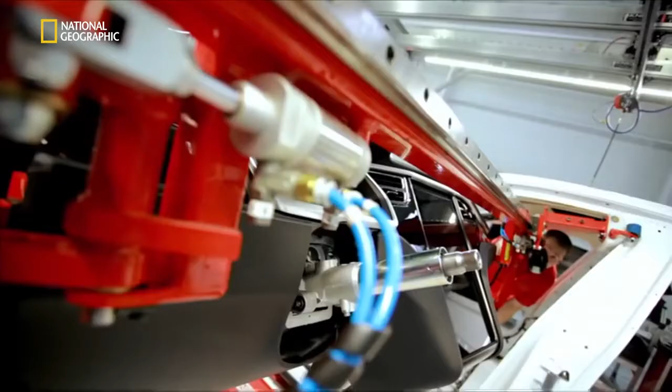At first glance, this car is the latest in a long line of high-end sedans. But that is where the similarities end. The Model S is a totally different type of car. Tesla believe it can lead a revolution and change the face of motoring forever. It's the first ever mass-made premium sedan powered purely by electricity.

Designed to have speed and range, and not a drop of gas. Our goal is to create an electric car that is the best car in the world and show that that's what an electric car can be. Tesla's goal is to kill off the combustion engine and prove the electric car has finally come of age. Driving a gasoline car is going to feel like yesterday. Driving this car is driving the future.

This is Elon Musk, Tesla's co-founder and CEO. Elon is an inventor and a maverick entrepreneur, one of America's youngest billionaires. I like exploring, I like technology, I like creating things that have never been seen before or even imagined before.

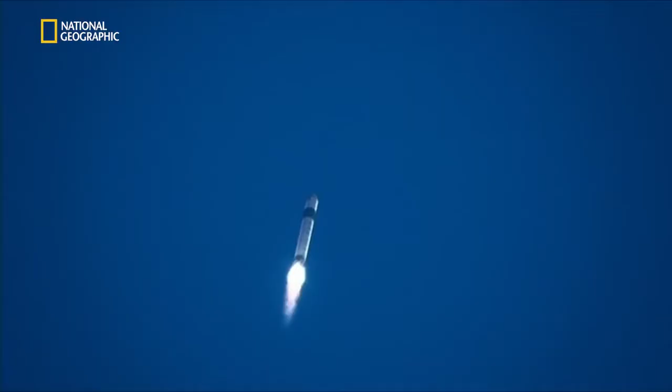He is a genuine Silicon Valley success story. In the mid-1990s, Elon set up a small internet company. By 2002, he'd sold PayPal for $1.5 billion. Next, he founded private rocket company SpaceX.

It's all part of Elon's life mission. When I was in college, I tried to think about, well, what are the areas that would most affect the future of humanity? So the three things were the internet, making life multiplanetary, and the third being sustainable energy. So that's what really ties together my companies, is that sort of thought from 20 years ago.

Tesla Motors is Elon's sustainable energy brainchild. Named after electric power pioneer Nikola Tesla, it's a car company that only makes totally electric vehicles. No hybrid and no alternative fuels. Absolutely no tailpipe. The company estimates their electric cars cause 50% less CO2, even if much of the electricity comes from a coal-powered plant.

It's technology Elon and co-founder J.B. Straubel believe we need. We're solving problems for our children, our grandchildren. Oil is a finite resource, and eventually we have to find alternatives. When you take that oil out of the ground and you burn it, it's extremely dangerous. We should not play Russian roulette with the atmosphere. We only got one.

Tesla's founders have a vision of a world without gasoline cars. They are convinced electric is not only cleaner, but better. Now, they want to prove it to the world. They believe their cars can trigger a transport revolution and bring electric motoring to the masses. What we're doing here at Tesla can have an amazing impact and revolutionize the auto industry and make every car on the road electric. That's our end goal.

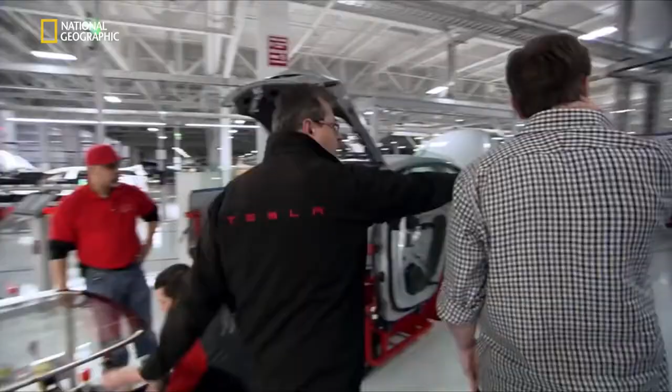Elon brings in Gilbert Passin as head of manufacturing. Gilbert is an expert from one of Toyota's award-winning plants in Canada. His description of my job to me was very simple: you've got to create the best factory in the world with the best people in the world and make the best premium car sedan. And I said, okay, so where's the factory? Well, you have to find one. Where's the team? Well, you have to make one.

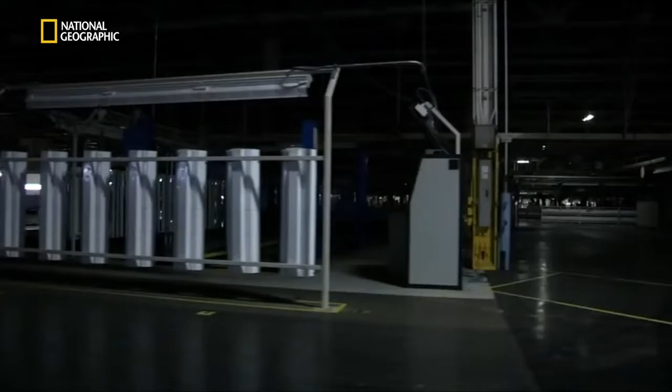The company purchased a former GM and Toyota site in Fremont, California, on the edge of Silicon Valley. The abandoned facility is a traditional car factory: dark, little natural light, bare concrete floors. When Tesla Motors move in, it's the birth of a mega factory like no other. It's a totally fresh approach to car manufacture.

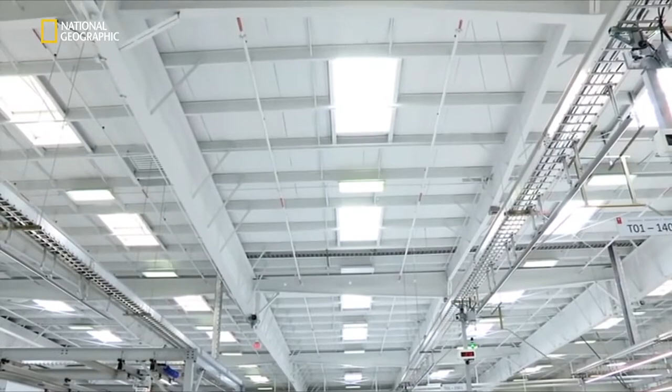The walls and floors are painted white. The machinery are striking red. Skylights and windows flood the factory with sunlight. If you make the factory pristine and clean, that sets the tone for the vehicle. We want that same sense of quality and precision in the car itself.

As part of the whole company ethos, bikes are provided so the workers can get around the factory. I think it's important to have an environment where people look forward to coming to work, so it's worth putting some effort into making the factory beautiful.

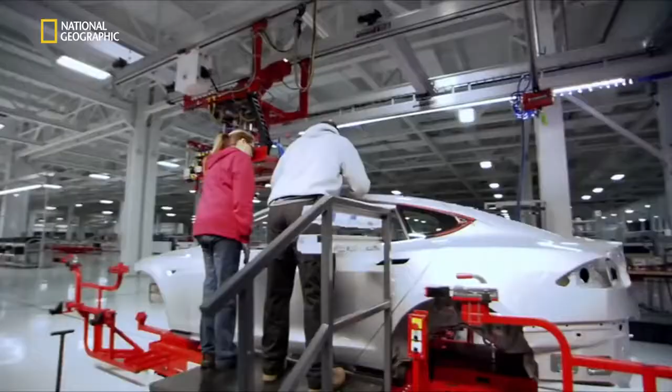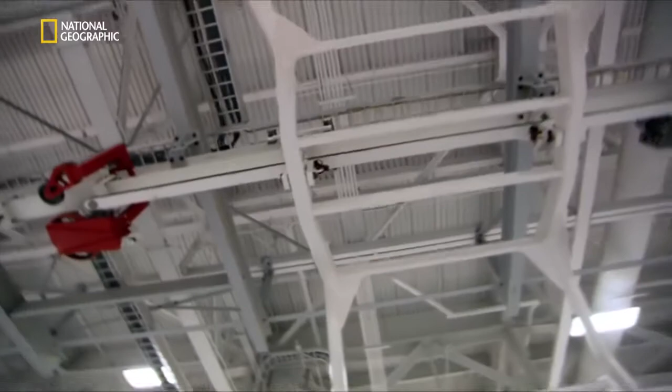In true Silicon Valley style, they fill the space with the most advanced technology, creating an automated production line capable of building tens of thousands of cars. Super efficient multitasking robots, self-guided smart carts, and computerized production schedulers. The factory is designed to be up there with the very best in the world. We love engineering. We love beautiful machines. We love new technology. We love to innovate with high technology. And also in manufacturing, we love to do that.

Without training, these sophisticated robots are useless. They all need to be taught before they can run tasks automatically. Every robot is programmed by hand. The Tesla team has meticulously trained 130 sophisticated robots over a year and a half.

One of the last robots still to be programmed is a multi-point welding robot. It will be used to join the car's underbody. These are pretty busy robots, so we got to make sure that our takt time is good.

A robot's work is only as good as the man who trains it. Brad Johnson is a welder with over 25 years' experience at the highest level. Getting this done today, we'll have the teachings all nice and smooth, and then we can start running 100% and full automatic. That sounds good.

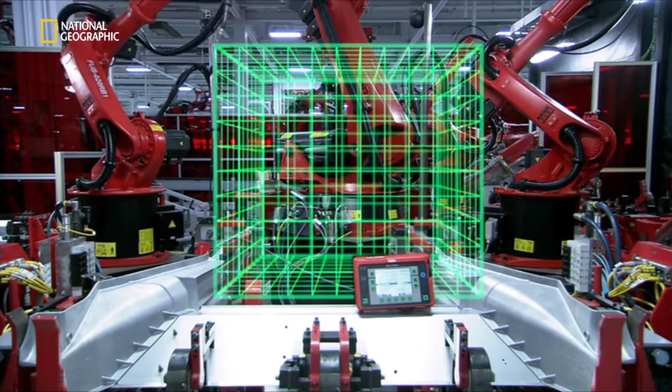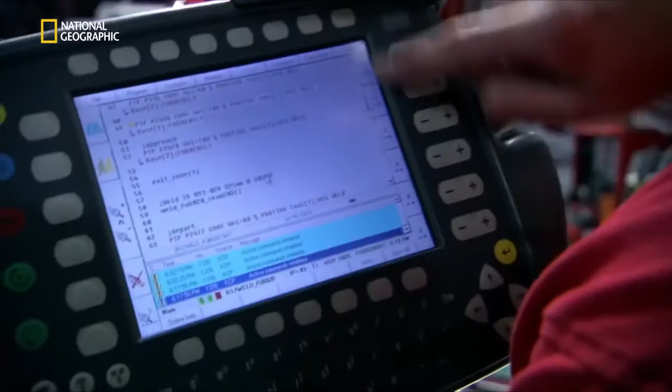The space in which the robot operates is treated as a three-dimensional grid. The head can be manually guided to any point using a teach pendant. There's our start point and our weld position. Brad guides the robot millimeter by millimeter and uploads the coordinates. The robot works out the most efficient route and runs the program.

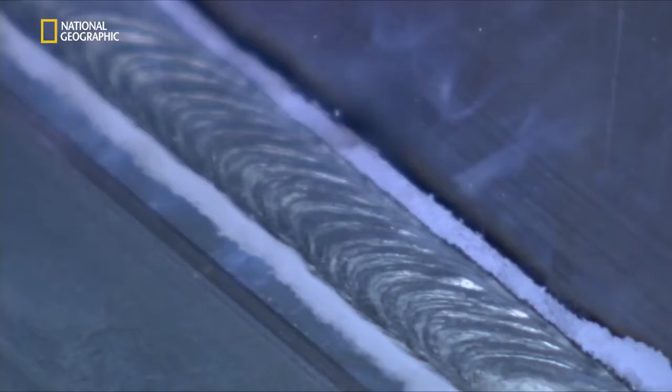Looks like the teaching is right on mark, and we have a really good quality weld right here. So we should be able to run full auto with this weld. When full production begins, Brad's handiwork will be exactly replicated by the robot 100 times a day.

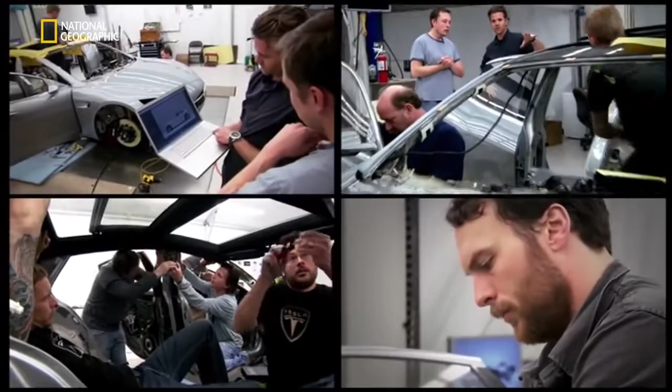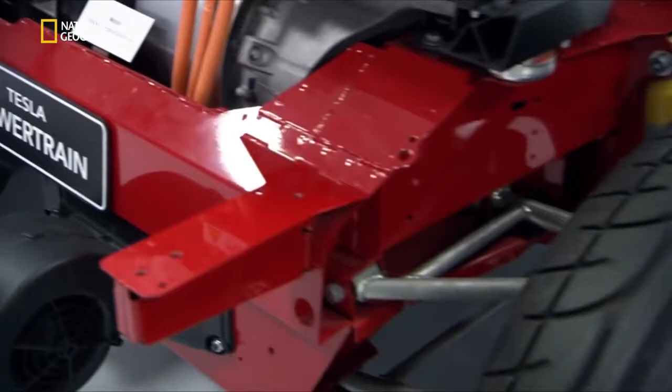Since their inception in 2003, Tesla Motors have been pursuing their electric car revolution with a step-by-step strategy. In an unconventional business move, Elon decreed that Tesla must invest in their reputation first and worry about profit later. Stage 1: make a small number of high-value cars that prove electric power can be desirable. The Tesla master plan is very simple. We start off creating an expensive, low-volume car to help break the mold in electric vehicles.

Plan in place, they set to work on their first car, basing it around the British-built Lotus Elise. 5 years later, they released the Tesla Roadster. Quicker off the blocks than an Aston Martin Vantage, the electric sports car astonishes the motoring world. Step 1 complete in the Tesla strategy. What we showed was that an electric car could be sexy, it could be fast, and it could be long range, and that if you produce such a car, people would buy it.

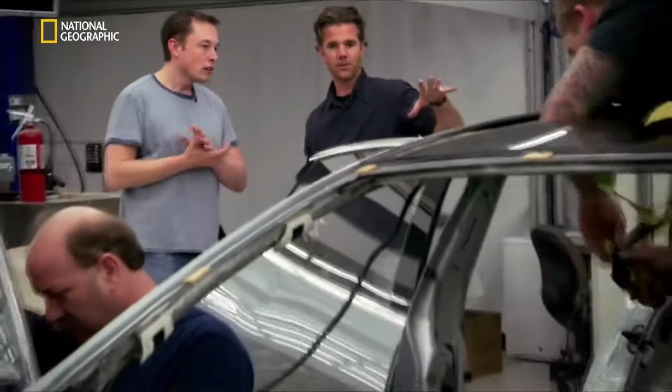But as a $100,000 two-seat sports car, it's a luxury second vehicle to most of its owners. Time for the pivotal Stage 2 in the master plan: a car that costs half as much and sells in much bigger numbers. A very important step in the Tesla strategy is really going to show that a mainstream electric car can be better than a gasoline car.

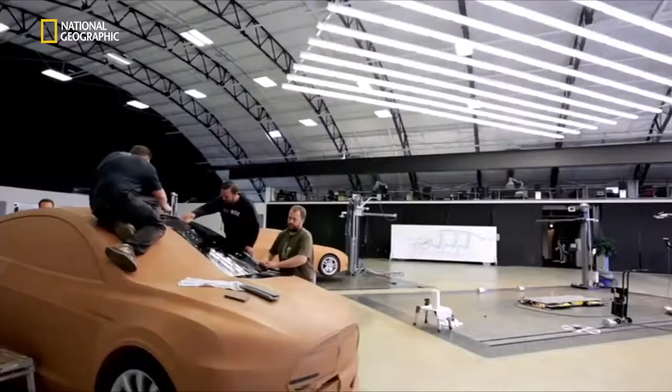The Model S is the second step in Elon Musk's vision of an electric revolution, a premium mass-market sedan designed and built from the ground up by Tesla. At the studio in Los Angeles, they are working to craft that car. The Model S is really the foundation of Tesla. It's the first true product designed, engineered, built, manufactured by Tesla, and it's really the beginning of what our mission is about.

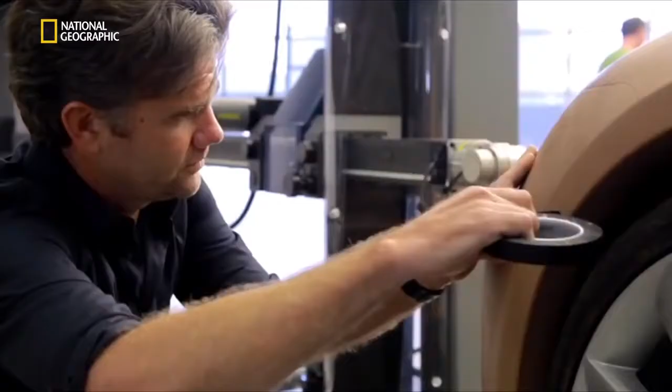Franz von Holzhausen is the chief designer. He believes Tesla's design needs to have some conventional appeal. It's really easy to have a clean slate and go pretty crazy with that. We had to start with something that people could relate to. If they even knew or cared that it was an electric vehicle, they were attracted to it.

We've stretched the sedan and made it a little bit more modern, but it's still a sedan. It still has this somewhat traditional cue, and so it's easy to love because of that association.

Although uniform in appearance, the Model S is a unique car. It was conceived as electric, and even the shape is designed to maximize the battery's range. The body and waist are all slim, so there's no excess fat or body mass on this car, and that translates into great efficiency.

This car is one of the most aerodynamic sedans on the market. In an electric car, conserving battery power is so important, the designers put huge efforts into reducing the drag. Even the door handles are aerodynamic, receding flush into the body.

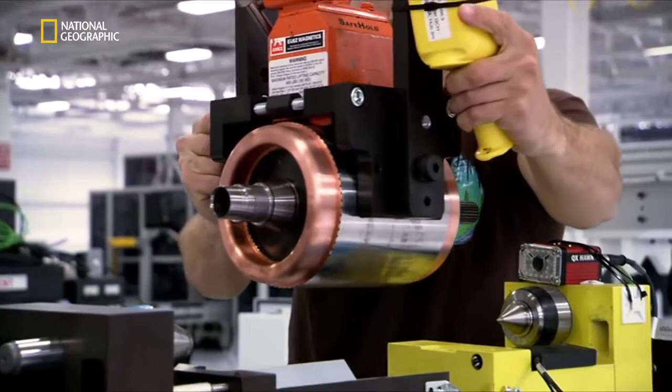But it's the interior that is most heavily influenced by the electric powertrain. The powertrain is incredibly small. You get the same performance out of a motor that's the size of a watermelon, fitting between the rear wheels, and everything else above that is what I call the opportunity space.

The design team started with the motor and flat battery pack and worked upwards. With the motor next to the wheels, there's no need for a drive shaft, so there is no rise under the rear middle seat. There is no fuel tank or transmission. The Model S has free space from the floor upwards.

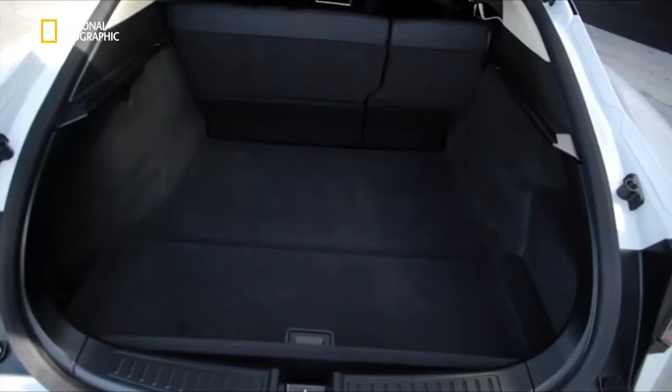What you'll see is a vast amount of space. In fact, it's actually so big that we decided we could fit 7 people, and we do that by putting 2 rear-facing child seats in the back here. You can see where they fit, and their legs go right down in there.

So this is what we call the frunk - it's really the trunk in the front of the car. You can put a whole bunch of stuff in here, even when the back of the car is totally loaded up with people and kids and stuff. And who doesn't need one of these?

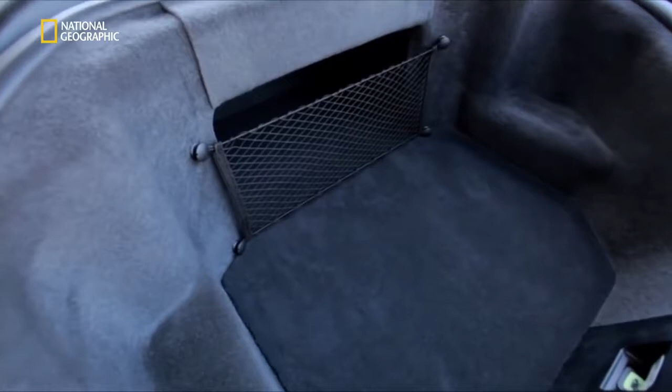Tesla promote these unique features at every opportunity. As a new marque, they're trying to make an impact in a marketplace crowded with established big hitters. Just looking at the United States, of the 3 other car companies, the youngest is 90 years old. So clearly this is not an industry that has been supportive of newcomers.

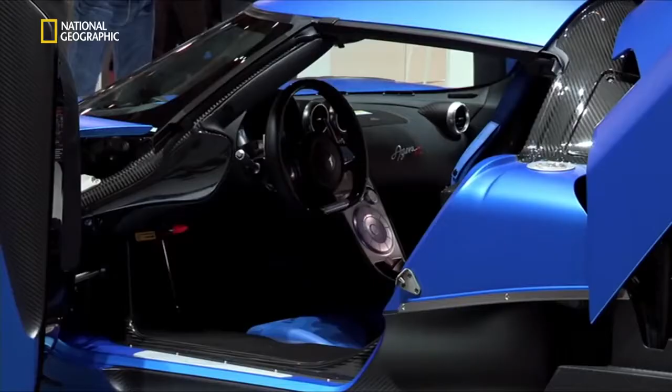The Geneva Motor Show 2012 - another leg in the company's relentless promotional campaign. We're done selling Roadsters in North America, so this is our product. It's our product, Tesla's product, and therefore we need to get it out to start selling.

Industry experts are judging Tesla on the Model S. It's seen as make or break. Maybe Tesla has a bright future. I think the Model S is very decisive to see if there will be a great future, or if there won't be a future at all.

The company have taken the risk of collecting prepaid orders on the car. They've amassed nearly 10,000 advance sales. The financial boost also creates real pressure. I get harassed quite a bit actually by some people who have reservations, and it's a lot of expectations, very high expectations that we're going to have to meet and exceed, really.

Some prepaid customers have been waiting up to 3 years for their car. In return, they've been promised a delivery deadline. I do feel an incredibly strong obligation to those that have placed their faith in Tesla and put down deposits. I'll do anything to make sure that their faith is not misplaced.

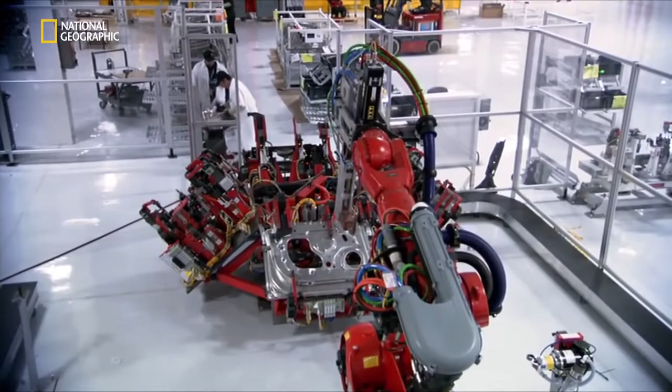The delivery deadline for the first cars is now only 2 months away, but the brand new factory hasn't built a production car yet. If the customers are to get their Model S on time, the facility urgently needs to start manufacturing. The speed at which we have to work here is extremely important to the company's bottom line. This is a kind of timing that is really, really challenging on many different accounts.

Tesla need to build 20,000 cars a year. But before mass production can begin, Gilbert and his team must prove the factory is ready. The company is relying on them to get it right. We have to make sure that car after car, the quality is there, everything is perfect along the way. So we are really gearing up towards a production ramp-up.

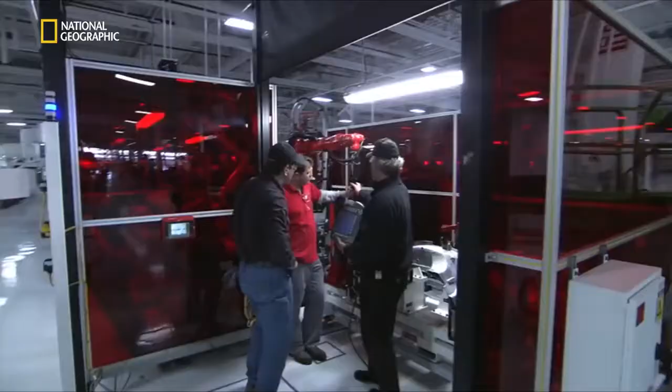Over the next few weeks, the factory will test manufacture a limited number of Model S. If the line doesn't perform with these cars, the company will be forced to miss their deadline. Tesla's electric revolution would be over before it started.

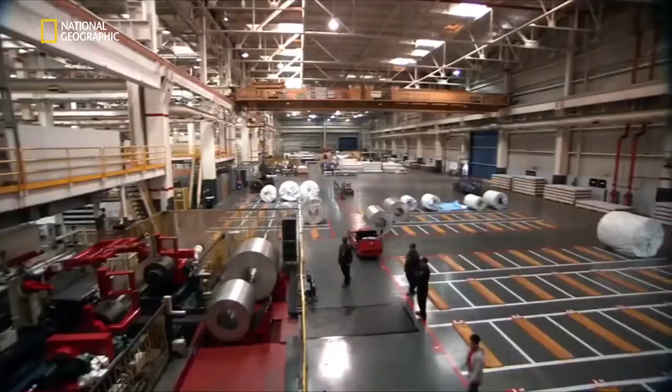A very, very important moment is the birth of Model S in our Tesla factory, and it's where the rubber is going to meet the road, so to speak. The process begins in stamping. To increase the battery's range, the company have decided to build 97% of the Model S with lightweight aluminium. It's an extremely rare feature in a mass production car due to the cost.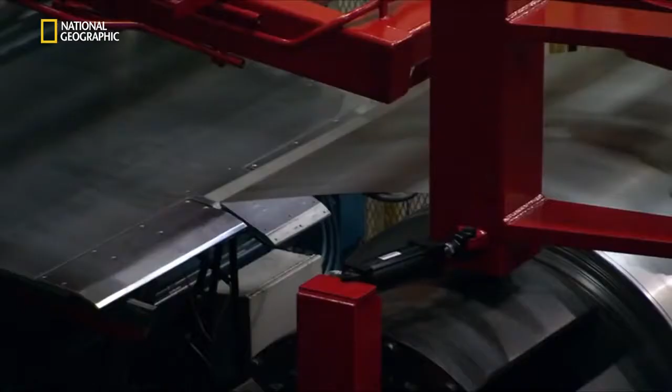Every Model S starts as one of these. The roll is loaded into the mechanical cutting machine.

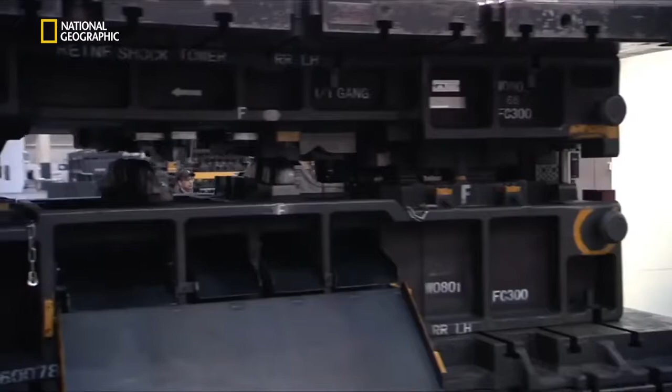Once cut, the panels are passed to the stamping press. We need to translate flat pieces of aluminum into 3D forms. How to do this with aluminum stamping, at the level of quality that we expect, is really, really challenging.

To meet the challenge, they buy the largest available stamping press in North America. It's one of the first pieces of equipment they install. Over 3 stories high, it has to be transported from Detroit on 70 trucks and then entirely rebuilt.

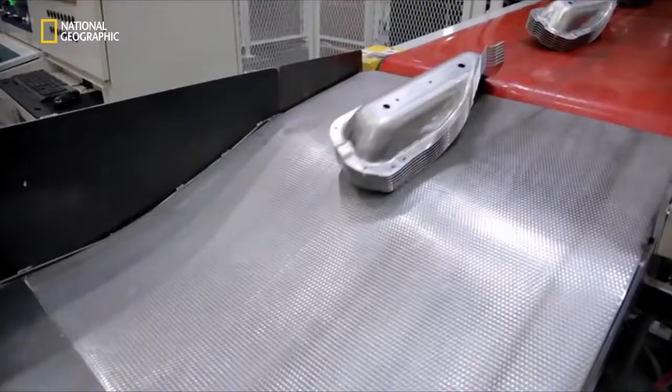The immense pressure from the stamp allows them to press the complex body shapes needed for the Model S. It can be mounted with different heads, known as dies, that mold the panels into a wide variety of shapes.

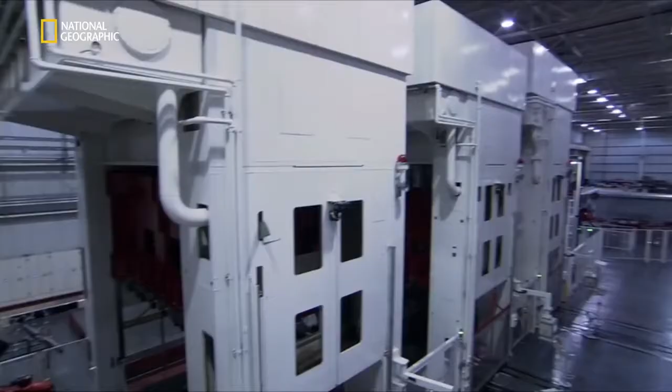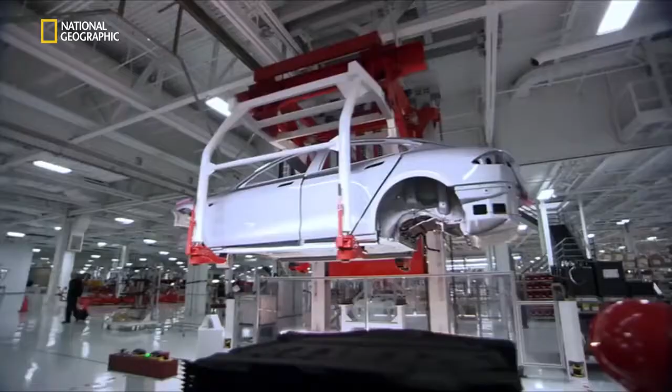Robotic arms feed the 4 stamps. Each stage forces a more detailed 3D shape, producing stacks of floor plates. These lightweight aluminum parts improve the Model S's power-to-weight ratio, which helps increase the performance and range.

The 2 things that obsess co-founder and technical chief, J.B. Straubel. Any ideas on how we can make it better? Performance and range were the 2 big issues that needed to be improved, and that's where we've put most of our focus on the technology and powertrain.

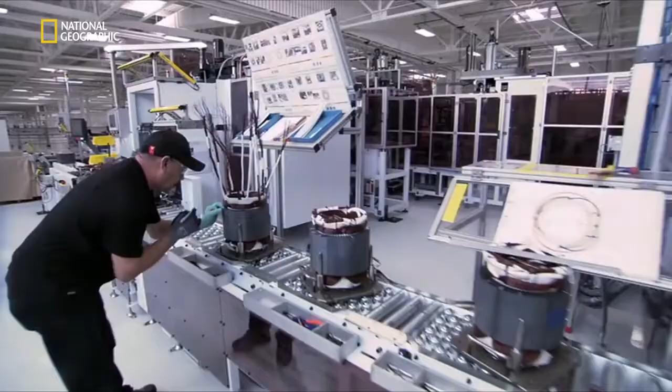Powertrain manufacture, 2nd floor. This is where they build the heart of the Model S: the motors and battery packs. Tesla know the electric powertrain will define their cars, so they push to advance the technology themselves. This is an extremely exciting field where inventions continue to happen even faster than they did in previous years.

Tesla's solution to improving battery life appears startlingly simple. They use thousands of small lithium-ion cells, similar to laptop batteries. Thanks to these regular batteries, the company says the Model S has achieved a top range of 480 kilometers.

Once you have 250 to 300 miles of range, then you're in a different usage mode. You're in a range that is equivalent to most gasoline cars.

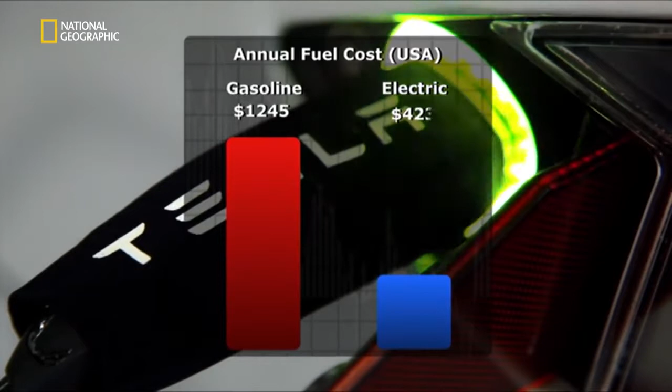The car can be charged by 100 kilometers every hour from a regular power outlet. Ultimately, Tesla are hoping to install superchargers along major highways that can charge the car to capacity in 45 minutes.

You can charge the car up every night, but you don't need to. You can actually charge it once a week.

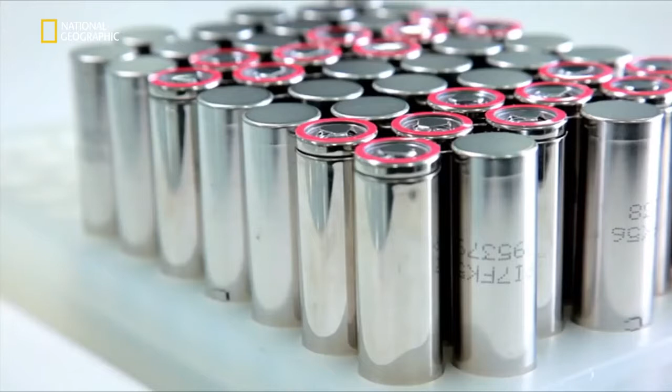The high-performance battery pack is formed with over 7,000 small cells. They're organized into a flat layer with specific groupings of positive and negative. The final layout is the key to the pack's power and range, and Tesla considers it absolutely top secret.

The motor unit is also developed in-house. It's essentially an AC induction motor, a concept invented by 19th century scientist and Tesla Motors namesake, Nikola Tesla. He harnessed an electromagnetic field to turn a basic motor.

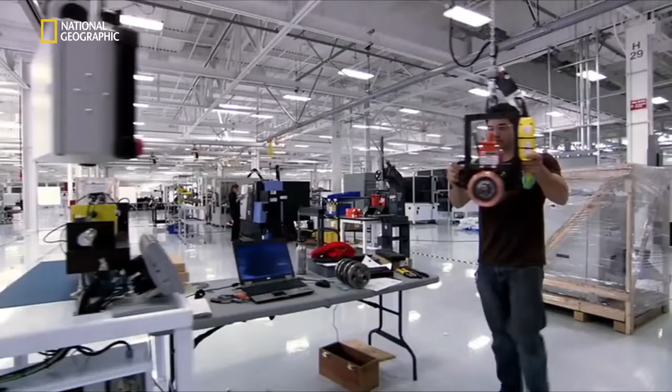Modern-day Tesla has developed their motor with a highly conductive copper cylinder. When the electromagnetic casing is fed with current, the copper cylinder inside starts to spin. It's nearly 3 times more efficient than a combustion engine.

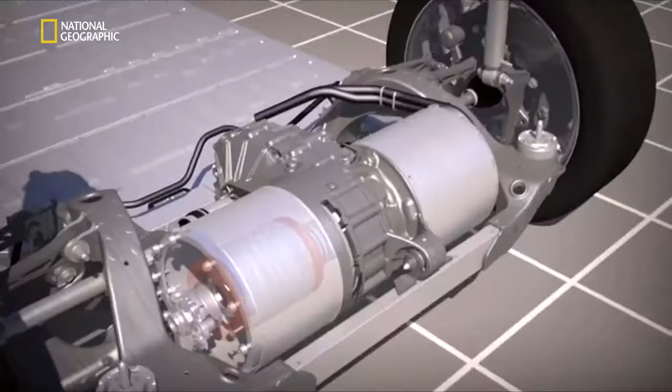In fact, there are only 3 moving parts. It connects directly to the rear wheels and doesn't need a transmission. These are the 3 moving parts in the whole Model S powertrain.

One of the cool things also with this very simple gearbox is that when we want to go in reverse in the car and back up, all we have to do is spin the motor in the other direction, and the car backs up. We don't need a clutch, we don't need a separate gear for reverse.

The entire drive unit is under 1 meter long, smaller than a golf bag. But it propels the Model S, a family-sized sedan, into the class of performance cars.

In fact, this powertrain creates a totally different driving experience. Program Director Jerome Guillen works constantly to refine it.

As with the light switch, electric power can be fully applied instantly. The first thing that's gonna surprise people is how much torque you get so quickly. That instant response - you cannot really mess with the throttle too much, because if you push on it, then the car will go.

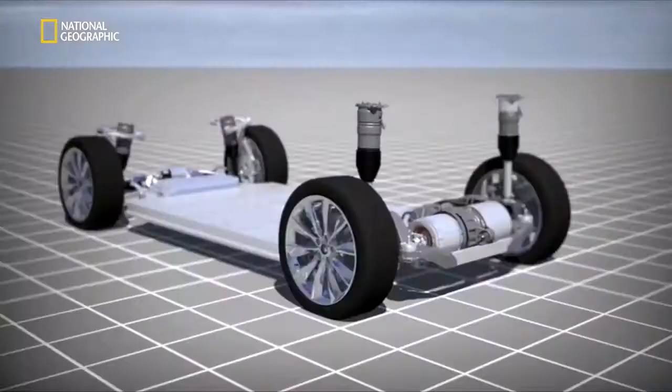But the real evolution in the way you drive is down to one of the central innovations in electric cars: regenerative braking. Although the Model S has traditional brakes, you don't have to use them. Regen braking can be engaged by simply easing off on the accelerator. When you want to brake, you just take your foot off the pedal, like I'm doing now, and the car brakes itself, so you don't need to use the mechanical brakes. When active, the regen system magnetically resists the motor's rotation, slowing the car and harvesting electric current. The energy recovered recharges the battery and extends the range of the car. When you put your foot down again, the electric power returns.

Tesla calls it one-pedal driving. It's a little bit different approach, but once you realize that if you take your foot off the pedal the car slows down, it's like, whoa, this is great. I can drive using only one pedal.

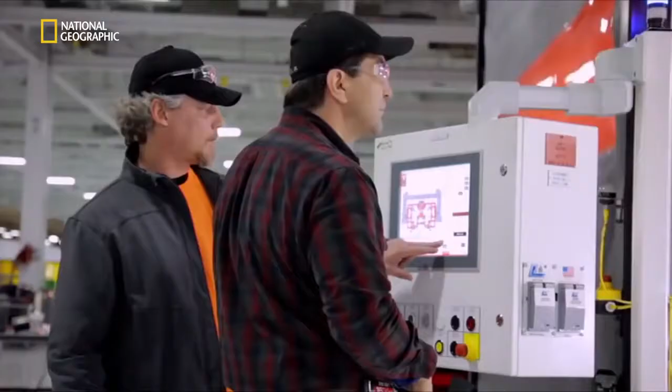In the factory, the delivery deadline is fast approaching. The Model S test production cycle reaches the main assembly area. The car is based around a partially steel underbody. To make it, engineers weld struts and casts into a framework. Brad's newly trained welding robot is about to be tested in full automation. They have trained the robots with prototype parts. Now, with final components coming through successfully from stamping, it's automated production for real.

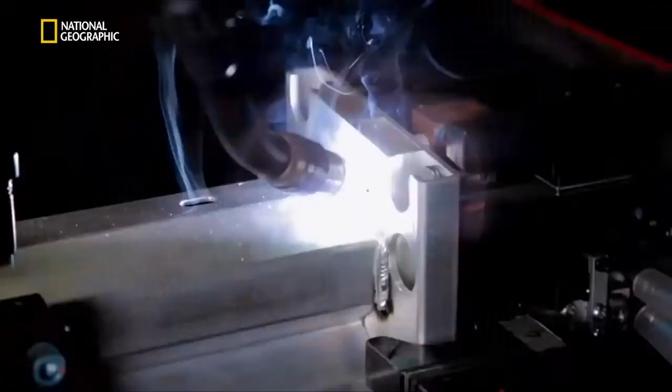Under observation, it's a tense time for the team. The robots work in a tightly coordinated chain. The second phase hits an issue. It shuts the whole process down.

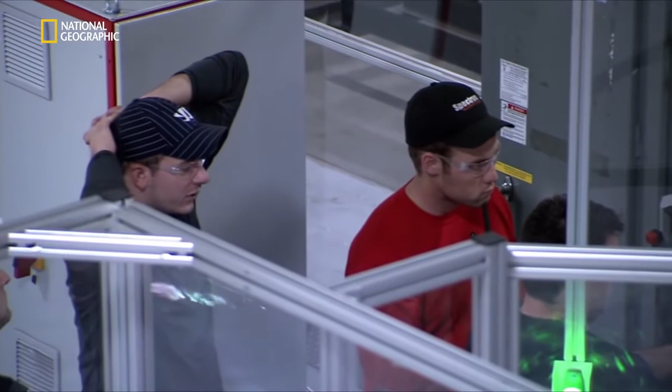With the deadline looming, Elon Musk is determined to keep Tesla's waiting customers happy. He's organized a Model S test drive event for the people who've placed deposits. The test rides will go out onto Jack Northrop Boulevard, so you'll get a chance to see that this isn't some show car that doesn't actually do what it says. It will go fast and with a lot of people in it. And quietly, yeah.

Many have prepaid years ago, and it's their first time inside a drivable Model S. Customer and board member Steve Jurvetson captures his experience on his mobile phone.

Wow, this is insanely cool. It's a surreal scene. It's way cooler than I can imagine. You really decked this out. Yeah, it's nice. The first ride has to be documented here.

The event seems a success. Now the company needs to make sure the customers get their Model S's as promised.

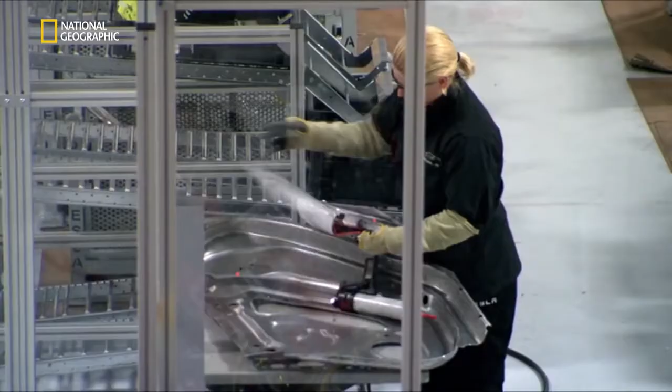With only weeks to go, welding has hit a glitch in automation. One of the robotic clamps is millimeters out of line. It's a tiny difference, but enough to disrupt the process. With the way the robots work and how we have such a tight tolerance of 1 millimeter to stay on, sometimes the new parts won't reach a prox, or the clamp won't close all the way. A major delay will disrupt the whole production schedule and threaten the deadline.

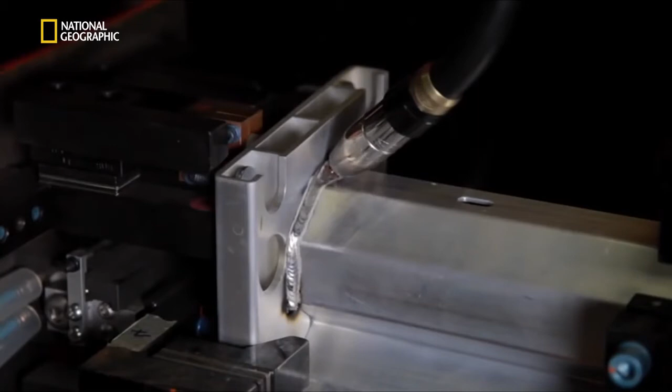They adjust the settings and set the robots in motion again. This time, it goes off without a hitch. To the team's relief, the process can be approved for mass production.

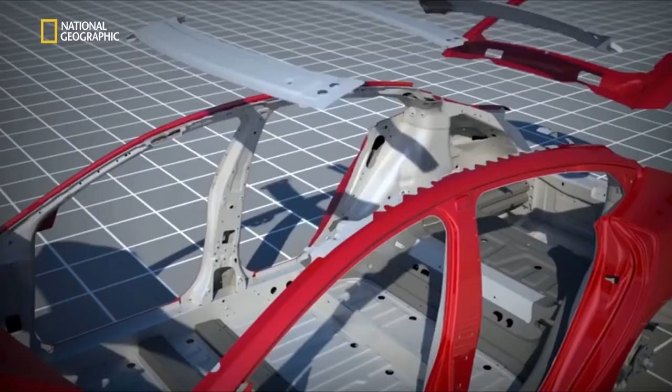The run through the automated line reaches the Model S exterior. The Model S body is made up of 14 different sections. To speed the workflow, Tesla construct each section at separate sub-assemblies, including the door sub-assembly. The internal frame is joined to the exterior panel. As the robot's pincers come together, they fire a rivet and join the aluminium sheets.

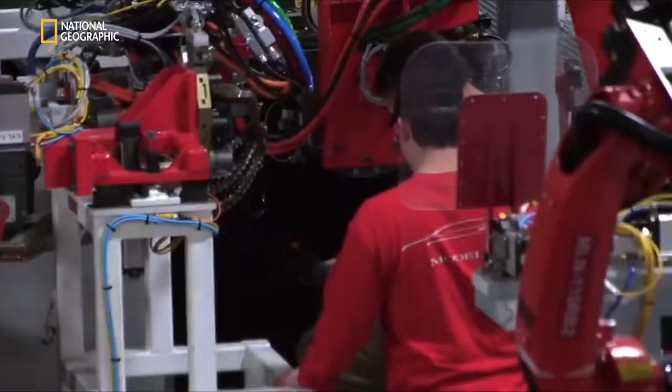Over to the right, side body sub-assembly. One of the most advanced aspects of Tesla's robots is that each arm can perform a variety of different tasks. We have to use all the gamut of technology to make the aluminum joint between stamping, welding, riveting, and bonding, using robots that are multitasking.

This flexibility is essential for a compact and efficient workflow. A robot can spot weld using a pincer tool, then automatically detach the pincer and pick up a clamp tool. The same arm that joined the panels can now move it to the next station. It's clever, but tricky and needs constant refining. When you draw something yourself, you take a pencil, then an eraser with the same hand, and you change the tool, so to speak. Same thing here.

Once assembled, the sections are brought together at body assembly. Here, they're riveted around the welded underbody to form the basic shell of the car. All the sections are lined up alongside the central framing line. Gradually, the automated line builds up the side sections, ready to house the doors.

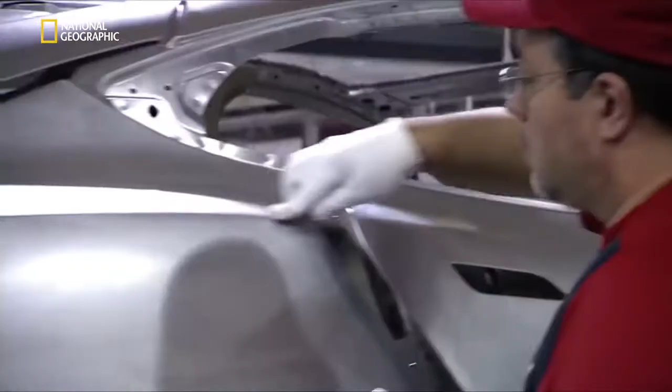A test batch of 3 cars is complete. Body assembly has demonstrated it can run successfully in full automation. It's a vital milestone in the countdown to mass production. Completely assembled, the aluminium body is now known as body in white. It's ready for some colour.

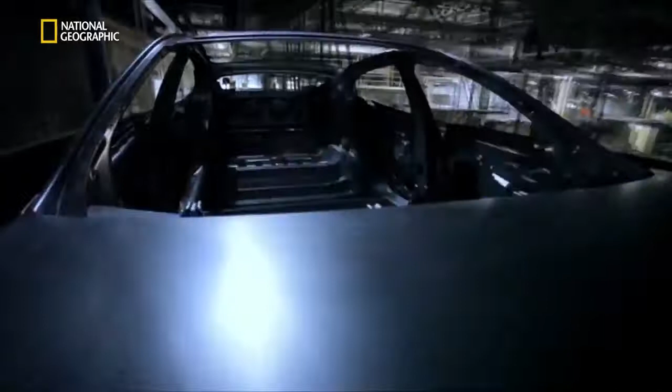The body in white is loaded onto an overhead train that carries it to the paint area. At this vast facility, the paint centre is in a totally separate building. The Fremont site covers nearly 95 football fields of space. It's so big, the Model S production line only fills 20% of it.

For Gilbert Passin, the extra space is the cornerstone of Tesla's grand strategy for an electric revolution. The Tesla factory is huge, about 5 million square feet on 2 levels. Right now we are only utilizing a small fraction of the space, but most of it, as you can see behind me, is what we call the dark side. It's dark and not utilized yet, even though we have a lot of plans for the future on how to fully utilize this entire building.

These expanses are an integral part of the company's stage-by-stage building plan. They want to fill the space with a production line for a further range of Tesla vehicles - a very high-volume, economy-priced model, the Stage 3 car. In the future, we intend to expand our range of vehicles, maybe of a smaller size and also more affordable for the market. This factory is ideal, and we are going to make this a super mega factory.

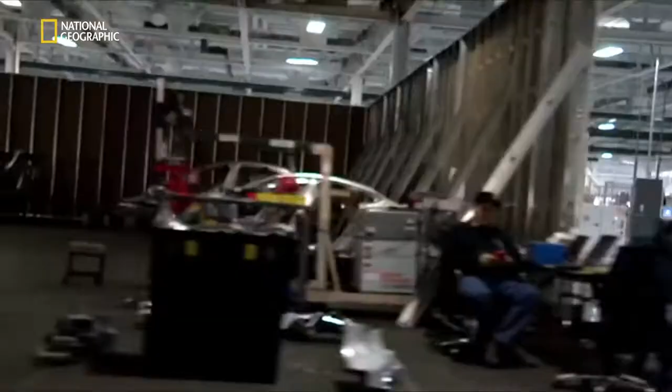Long term, Fremont is meant to produce the low-cost Stage 3 electric car in the millions. It's the final step in Elon Musk's Tesla master plan. To really have widespread adoption of electric cars, we have our 3rd generation vehicle, which would be a low-price, high-volume vehicle, and that's really what's going to fill out the rest of this humongous factory. I'd love to bring this to 500,000 vehicles a year as soon as we can.

The future of Elon's strategy first depends on the success of the Model S. In production, the time to the delivery deadline is now running low. The aluminium body arrives on the overhead train from Body Center, into Paint Center. This is where they make the car look like a premium sedan.

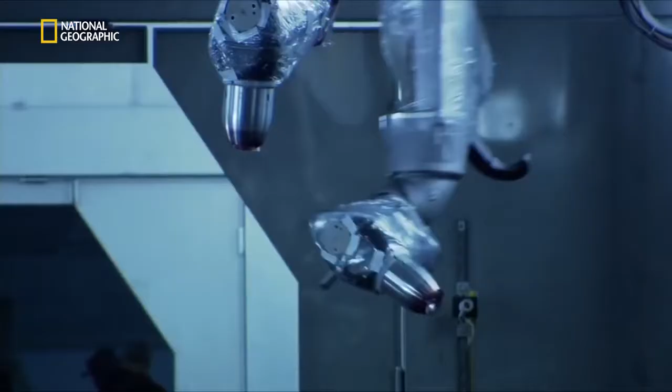It's a state-of-the-art process. There's a lot of technology that goes into the Tesla car, but the very first thing they'll tell you is what colour of Tesla car they bought. That's how important the paint is.

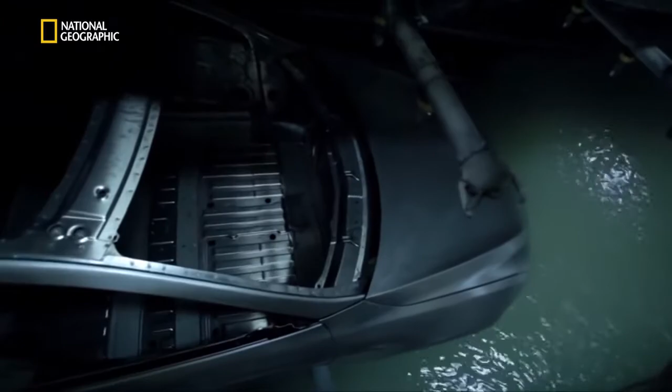First, a roller coaster ride of treatment baths: detergent to clean the surface, and then electrocoating. The electrocoat helps attract the paint to the aluminium. The primed car is ready for colour.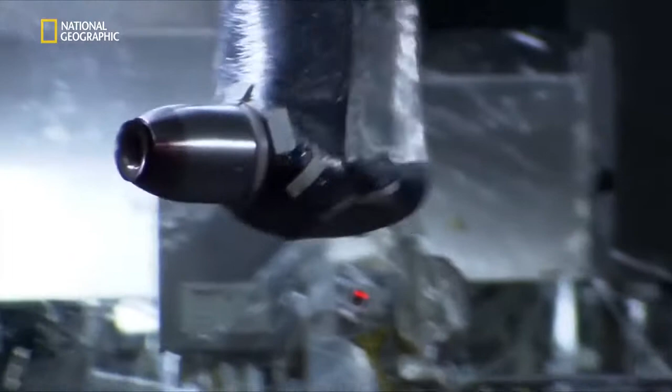This vehicle will be sprayed with their trademark tint, what Tesla calls Signature Red. It's a colour we developed that's different from anybody else's red. It's been developed with glass flake to get the specific type of sparkle we want in that paint.

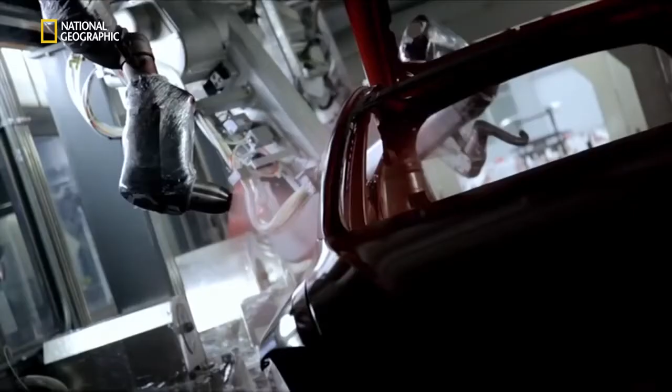It's a masterpiece of perfectly choreographed automation. Even the paint robots multitask, using a handle to open and close the doors.

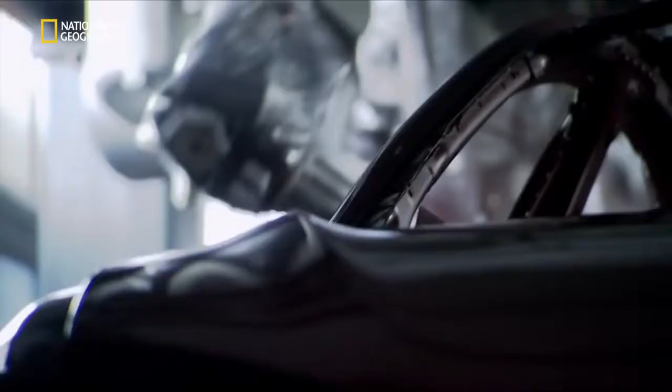Once it's through, the painted body heads up into the ovens to be baked and double glassed. A specialist team spends hours assessing the finish before the car is passed. Elon's made it very clear to us what his expectation is for the paint job - he wants our paint to look like glass, like a piano finish. That's the challenge we've been given, and that's what we're going to do.

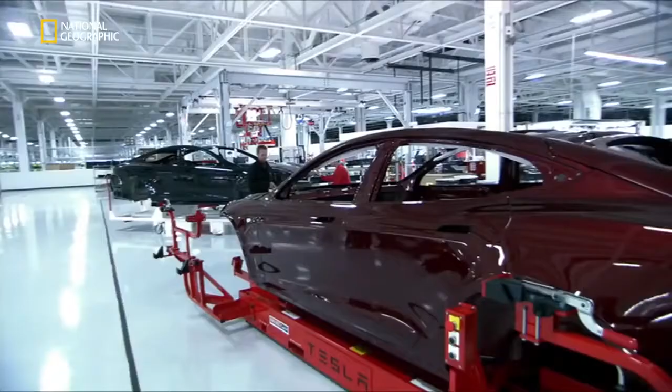The Model S spends over a day and a half in paint. And that attention to detail carries through to general assembly.

First, the Model S's panoramic glass roof. The installation robot takes a picture of the top of the car, using the digital picture to measure the exact orientation and bond the glass.

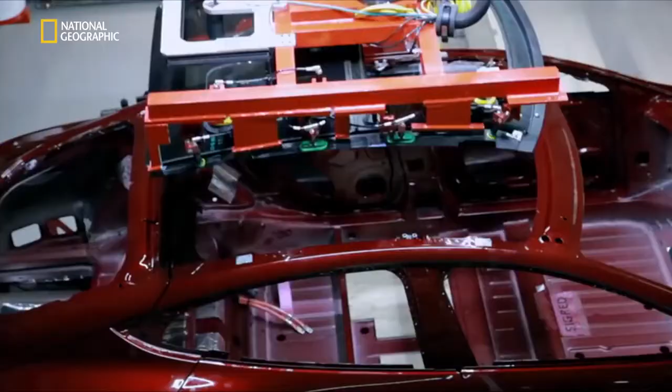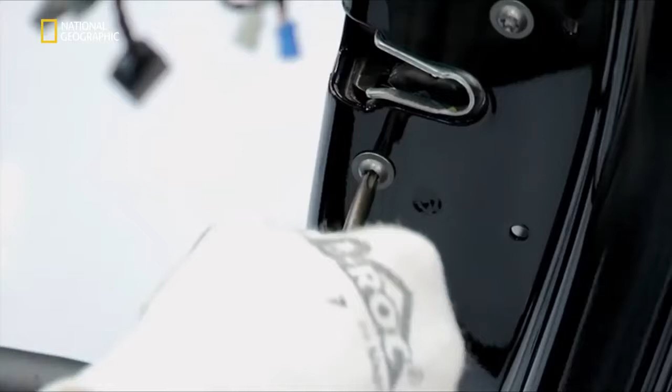Next, the interior. The wiring and seats are fitted, and the aerodynamic door handles are installed. To get the delicate installation right, a wireless system adjusts the torque for each bolt.

The cutting-edge dashboard is lowered into the car. It's proof the car is a product of the tech-savvy US West Coast. The Model S carries a touchscreen tablet inspired by Tesla's Silicon Valley neighbors.

Tesla is very much a Silicon Valley company that has a Silicon Valley operating system, similar to a Google or Facebook or Apple, joined together with a tremendous amount of great automotive expertise. It's about bringing the things we're used to, our phones, our computers, and the interaction we have with them into the car.

The car has a mobile 3G internet connection. The driver can download software upgrades and customize the display. The car's always connected to the internet, so we can understand your daybook, and we can know that you're going to work at 8 a.m. on Monday, and the car can be warmed up for that experience.

The entire command center is housed on the 17-inch tablet. The interior is virtually buttonless. It does some really amazing things. Not only does it make the rest of the interior super clean and uncluttered, it allows you to have amazing control of the car, with just the push of a button.

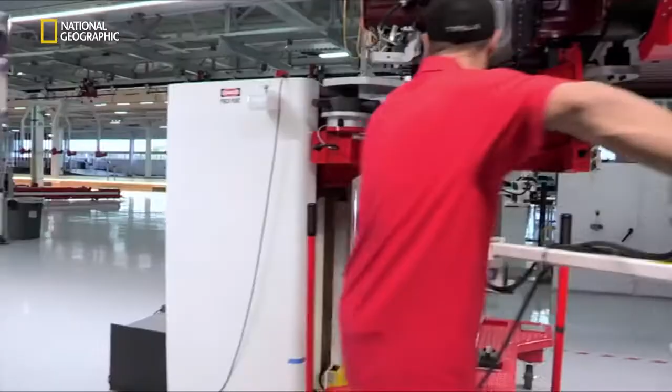In gasoline cars, installing the drivetrain is a lengthy process. With electric, it can happen in just 2 steps. Step 1: the motor unit, complete with suspension and brakes, is bolted into the rear wheel berths. There is no drive shaft or transmission to be attached. In one motion, it's fitted.

With every vehicle, they're ramping up to the full production cycle time, or takt time. Every station here in the factory has to achieve a certain operation in that takt time in order to get it to our customer on time.

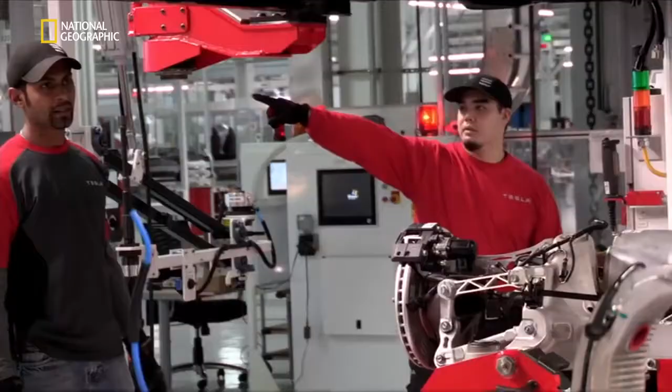Here, the target is 4 minutes and 40 seconds. Throughout the build, every single time you may hear me in the background saying, we're at 2 minutes, we're at 5 minutes, right? So they can know exactly where they are when we're shooting to get to that 4 minutes and 40 seconds. Step 2: battery pack installation.

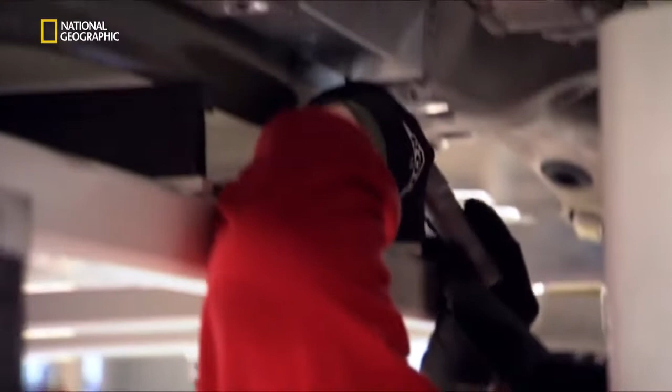The pack's steel case acts as the car's chassis. Bolted into place, it gives the Model S its rigidity.

A stage along, the first complete cars arrive at final inspection. At Elon's insistence, inspection happens on a bamboo platform. He believes you can only judge a car's beauty if it's framed by beautiful surroundings.

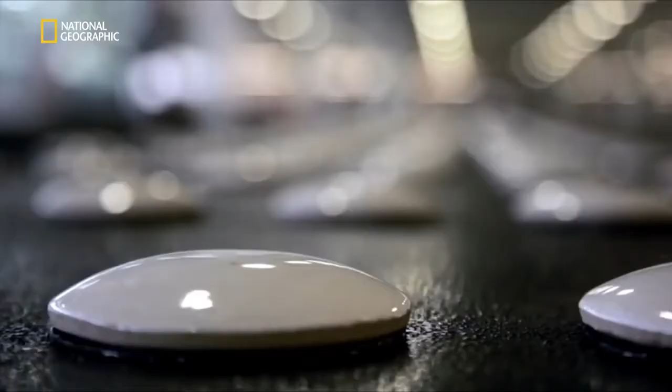The last check is the test drive. At Tesla, the track is very different. Because electric cars produce no exhaust fumes, they can be driven indoors.

Our people have done so well at putting this car together. You can see the remarkable quality of the paint and the entire vehicle, the body fit and everything. I'm so proud today.

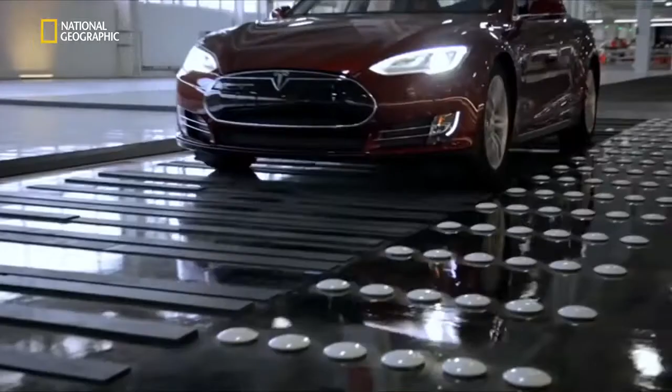This is the first Model S to pass through the production test run, and its quality proves the new megafactory is ready for mass production. It's a big moment for the company.

Just to see this car going around the test track here, it really demonstrates the fact that the Tesla factory is ready to go. I just have to make 20,000 per year more of this kind, and it's sort of a done deal. We just have to get it done.

The factory can now push towards the delivery deadline, allowing Tesla to pursue their strategy for an electric car revolution. Can you imagine if all the cars in the world were able to have zero emission, zero noise, and we could do that in a perfectly clean environment? That would be so cool.

This is Tesla's vision of an all-electric future. No fumes or heat, no noise or dirt, no expensive gasoline. Just clean and quiet streets.

It's truly impressive to see how we are, day by day and person by person, changing people's thinking about what electric vehicles are versus what we've all grown up and taken for granted. If we can do that through one product, that's unbelievable.